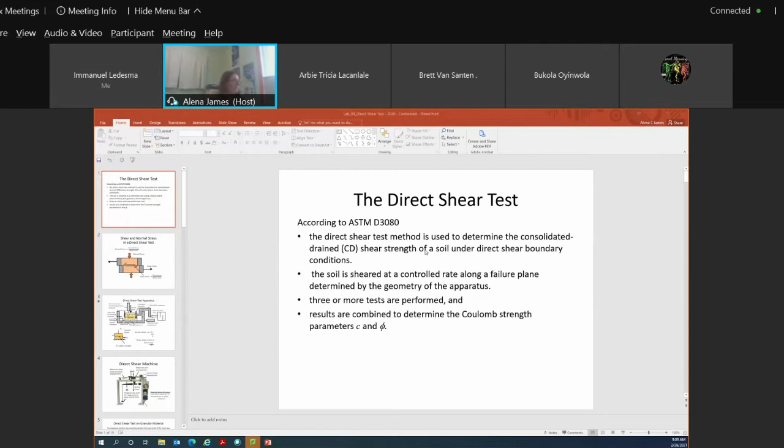This is a schematic of what your direct shear apparatus would look like. With direct shear testing, can everyone see I have two little notepads, they're kind of fluffy, one's pink, one's black. Hopefully you guys can see it. I tried to do this so you could see the difference. Imagine this pink fluffy notepad is the top half of your shear box, and the black fluffy notepad is the bottom half of your shear box.

With a direct shear test, you're applying a shear force to your shear box. On one side, on the top half of your shear box, you have an arm, and what this arm is doing is holding the top half of the shear box stationary.

So the top half of your shear box, this pink fluffy notepad, isn't able to move when you're applying a shear force to the shear box. You have an arm that holds it in place, and a load cell attached to that arm. This load cell measures the shear force required to hold the top half of the box stationary. Meanwhile, the bottom half of your shear box is able to move.

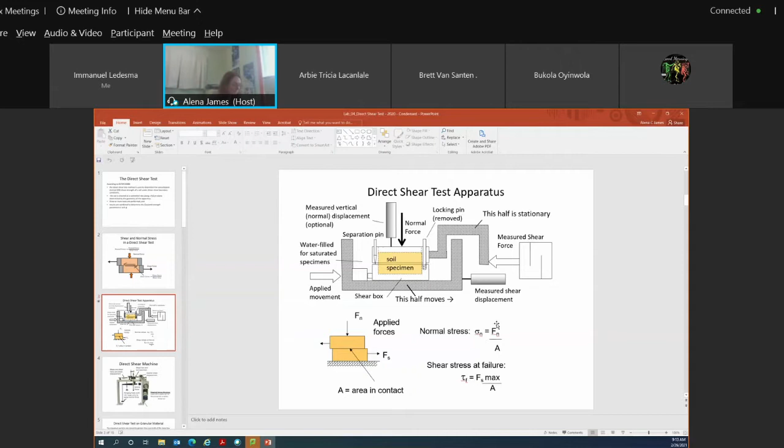In our lab, we generally only do direct shear testing on granular material, because it can be done really quickly. I'll talk about direct shear testing on clay in about half an hour. We do granular material because it can be done quite quickly - you can run a test in about 15 minutes.

The shear box is shown on the right-hand side of the PowerPoint slide, and generally the shear box is about 60 millimeters long by 60 millimeters wide, ranging between 25 and 30 millimeters in height.

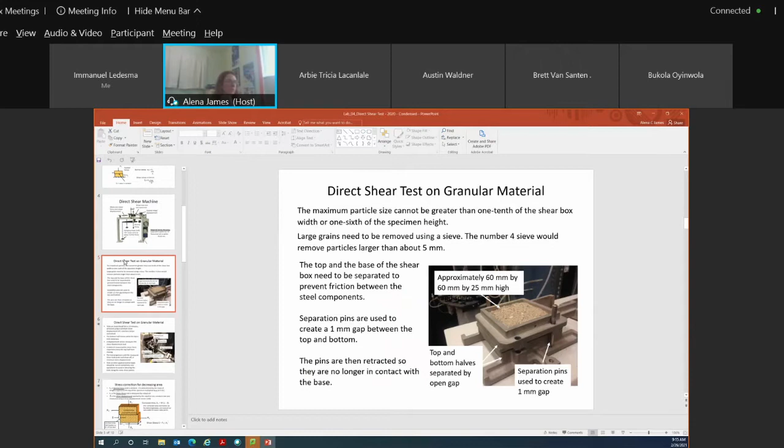When doing the direct shear test, we need to separate the top and bottom half of the shear box so that we don't have any friction between the steel components during the test. We use something called separation pins, so we can create that 1 millimeter gap and avoid friction between the steel while conducting the test.

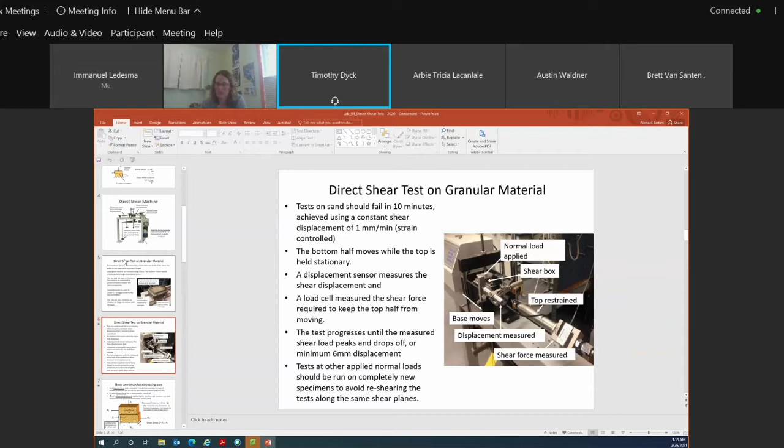So we're talking about a contact area at a specific moment in time during the test. Correct. When you do your analysis of direct shear results, you always take your maximum shear force. So your maximum shear force, if you were to convert that to a shear stress, you take the contact area at that one moment in time.

So when we're doing the test, we measure our shear force and our displacement every 5 seconds. So you would need to calculate your corrected area at each of those 5-second intervals. Your corrected area always varies because it's at a specific moment in time.

Does that make it clearer? Yeah, I think so. Okay. Anyone else want to jump in? I'm happy to answer any questions.

As I mentioned, you have to run 3 tests. Once you run one test, say using an 8 kilogram normal load, you would run your test. Then you would have to empty your shear box and put a whole new specimen in, and conduct the test again at a 16 kilogram normal force. You would go through until the shearing process is complete. Then you would remove that specimen, put a new specimen in the shear box, and run the test again at 24 kilogram normal force.

So with a direct shear test, your normal force is always constant. When you're calculating your normal force, it's determined by the mass of the weight applied to the top of the specimen. You can't actually physically apply the weight directly to the top of the specimen — you're putting the actual weight on the lever arm portion of the direct shear apparatus, and then there's an arm that comes up and over, and that force or load is applied to the top of the specimen.

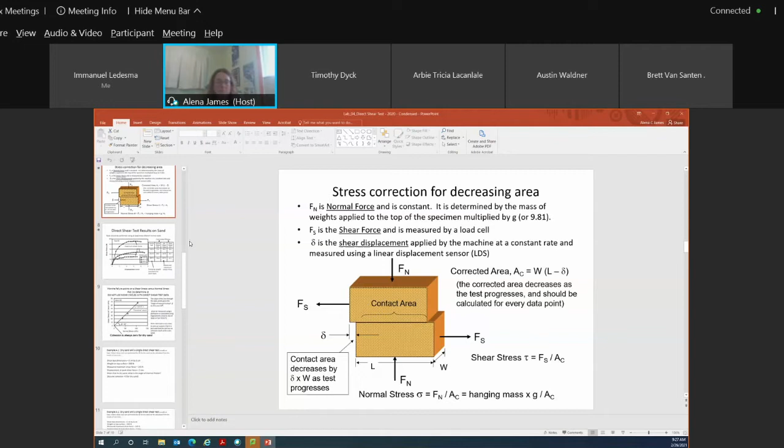Does this make sense? I just want to make sure everyone understands. Okay.

No, it's only a rectangular one, no cylindrical surfaces on the test. Yeah, those are kind of funky equations. No, anything I test you on is only related to the example problems we've gone through. If we haven't done an example problem on it, you're not going to be tested on it. Sometimes I just give you information in case you're exposed to it in industry, but if there's no example problem on it, you won't be tested on it.

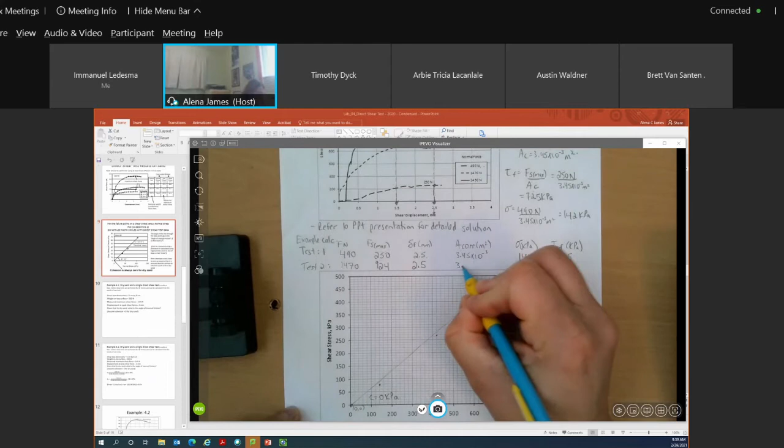If I go for test number 2, I do the same process. So I have 1,470 newtons normal force, and my max shear force was 924. My displacement, again, is 2.5, so luckily my corrected area is the same, still 3.45, because I measured the same shear displacement at failure.

So I'd just be calculating a new normal stress. My normal force is 1470, giving 426 kPa. And then my shear stress would be 267.8 kPa. So I simply plot this on the graph: 426 and 267.8, and I have a data point there. I'd go through the same process for my third graph.

So I'd use my third line on my graph. Again, I know what my normal force is, and I know what my shear force is. I would calculate my corrected area and then calculate my shear stress and my normal stress.

You find your... did I mess this up? Oh, okay, that's the next question.

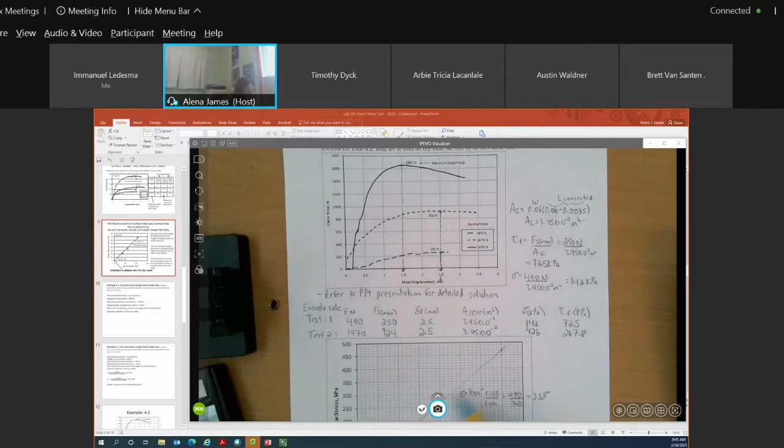So anyways, I always go through 0, 0 and do my line of best fit, Suraj. I do that, and then I plot up my third data point, which is approximately here. I think I calculated it, Kelly had it right, 470.9 and about 700.

And so I just drew my line of best fit through 0, 0 and these 3 data points, and I got about 33.8-ish as the slope of my line, or I did the arctan of it. So I calculated my friction angle to be about 33.8.

I'm going to flip over to this, okay, you guys can see this. My normal stress was about 698, or 700 is close enough. And my shear stress, I got about 470. I think that's what Kelly got.

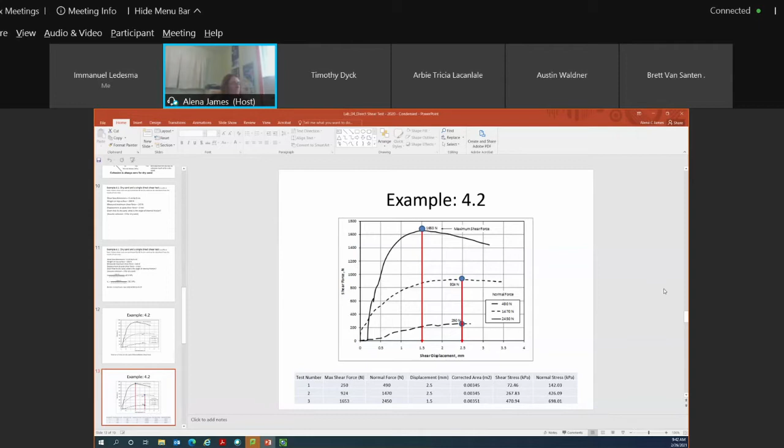Yes, so for test number 3, this would be your shear and normal stress, and that's what you would plot on this graph. Then you draw your line of best fit going through 0, 0 and calculate the slope of your line and take the inverse tan. That's how you calculate what your friction angle would be for the sand material.

On a test, you would need to indicate to me when I ask you to calculate the shear strength parameters for the sand material. There are 2 shear strength parameters you need to tell me about. The first is the friction angle, which you calculate from the slope of the line. The second is cohesion. It may make sense that it should be 0 because it's a sand material, but you still need to identify that to me on your graph or elsewhere: my cohesion is equal to 0 kPa.

Any questions on how you do the direct shear analysis for a sand material? So for finding the angle, you're just picking a point on your best fit line and using that as your inverse tangent for your result? That is correct, yes. And there's a range, usually I take plus or minus 1 degree with respect to calculating your line of best fit.

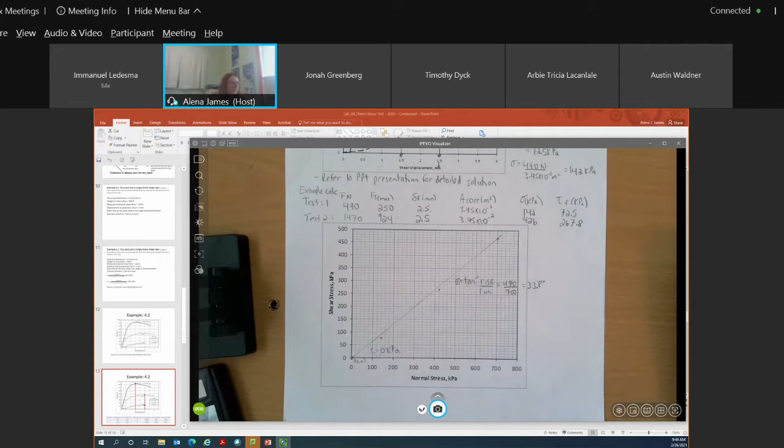Any other questions on how you calculate your shear strength parameters for a sand material?

What does friction angle imply? Friction angle represents the strength of your material. Imagine if you had sand being dumped by a dump truck. The stronger a material is, the higher the friction value that it has. Friction angle also represents the natural angle that material would stand at if dumped freely. So if sand was dumped and formed a cone shape, that's the angle of repose, the angle the material stands at without being interfered with. So a higher friction angle means a stronger material, Suraj.

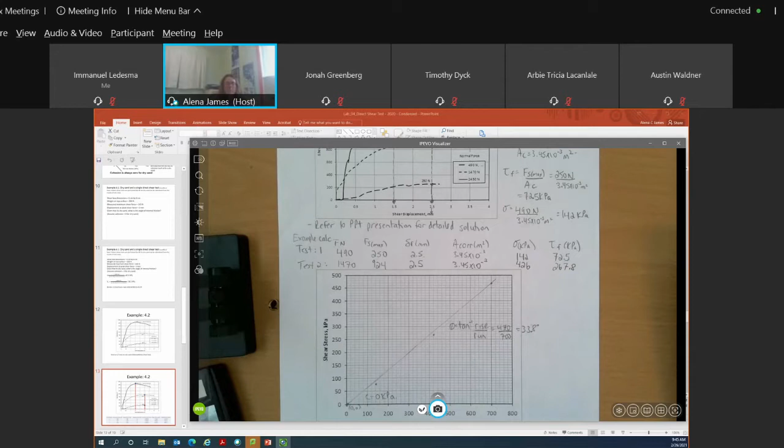Okay, I'm going to move on to this slide here. I'll spend a couple of minutes talking about direct shear tests on clay material, and then we'll go through an example, and then you guys can have a break.

Direct shear tests conducted on sand are always considered consolidated drained tests. This means that when we're conducting the test, we're not generating any excess pore water pressure, because we're not shearing at such a high rate. This will make more sense when we talk about triaxial testing. Sand is quite porous and has high hydraulic conductivity, so it doesn't matter if the sand is wet or dry when conducting the test - excess pore water pressure drains almost instantaneously. So we don't have to slow down the shearing rate, and our test duration is quite short, in the 10 to 15 minute range.

Whereas if we think of a clay material, if we add additional weight, clay is not very porous and doesn't have high hydraulic conductivity. So when we add that additional weight, we generate a lot of excess pore water pressure. We want time for that excess pore water pressure to dissipate, so the shearing rate in a clay direct shear test is really, really slow. In sand we could obtain a data point in 15 minutes, whereas in clay it takes a week to two weeks to generate a single data point. So to generate our Mohr-Coulomb failure envelope for a clay material, it takes anywhere from a month to 6 weeks, instead of an hour and a bit.

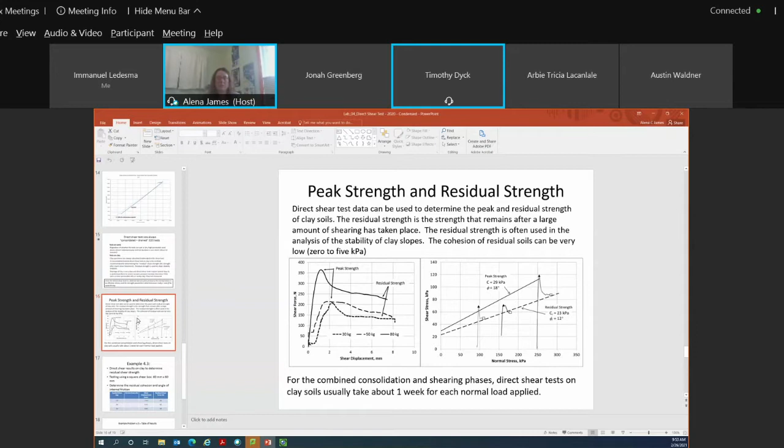Does that make sense? Yeah, I think so. Okay. I'm happy to answer questions after as well.

Hey, just another question. Sure. So in the real world, when you have a slope failure, does it happen very slowly at this rate, or would it happen more abruptly, like all of a sudden?

They happen slowly. They're almost always occurring, especially on outside bends. There's always some displacement because there's erosion at the toe or the water levels going up or down, but it's usually some event that precipitates the major movement so that it becomes observable.

So the two most common times of year when you'll see slope movement are associated with river levels going up and down. If you have a flood event and your river level's high, the stability of your bank actually increases, and the potential for movement is minimized because you have hydrostatic forces acting on that bank, preventing the movement from occurring.

But when the river levels drop, all of a sudden you have a saturated bank trying to push those soil particles apart. So the strength of your bank becomes reduced, you don't have that hydrostatic force anymore, and the bank weighs more, so the bank wants to move.

So that's one common time, or the other common time is in the fall. I don't know if everyone's seen where the river level drops a lot in the fall, especially after they draw down at St. Andrews Lock and Dam. That's another common time of year when you'll see riverbanks move, because the river level used to be higher and then all of a sudden it's lower, and the banks are still saturated from when the river was higher.

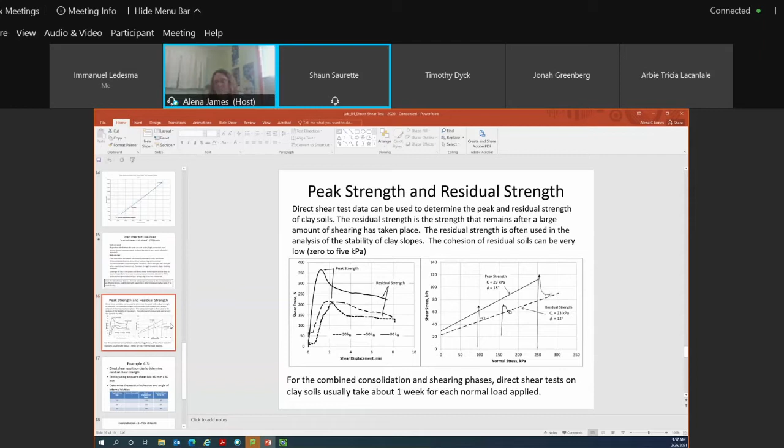Exactly. So think of it in terms of constructability as well, right? When you guys do a proctor, you have an optimum moisture content. If you're trying to construct with material that's to the right of your OMC, it becomes quite hard, and you have to use various techniques to dry out the soil. And if you're to the left of your OMC, it's also problematic because you can't get proper compaction.

Thanks for the answers. Yeah, no problem, hopefully.

Okay, I'm sure you guys are almost done. So we'll work our way through this example problem, and then we'll take a 10-minute break.

Okay, so example problem 4.3 is a direct shear test on clay material. So instead of being on sand, it's on clay material. So what would we know for sure about this question when I say that it's on clay material instead of sand? Right, perfect. Cohesion's greater than zero.

So this means that your line of best fit does not go through the data point zero, zero on your graph. If we look at this here, I've already given you your applied mass, your shear displacement, and your residual shear force. To convert from applied mass to a normal force, you just have to multiply by 9.81. So you'll see here, you just have to go 10 kilograms times 9.81, or 20 times 9.81, or 30 times 9.81.

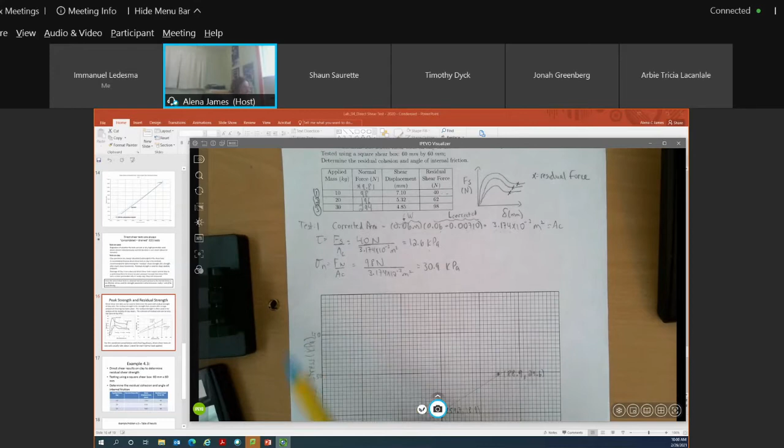My normal stress, I calculate that by using my normal force and dividing that by the corrected area. I calculated my normal force to be 98 newtons, and I divide that by my corrected area, so I get 30.9 kPa as my normal stress.

So I would want to plot this on my graph down here. You'll see with this graph I've labeled it as shear stress in kPa versus normal stress in kPa. It's always important that you label the axes of your graph and provide units, and you will be marked on that on a test, providing the correct labels for your axes and including the units.

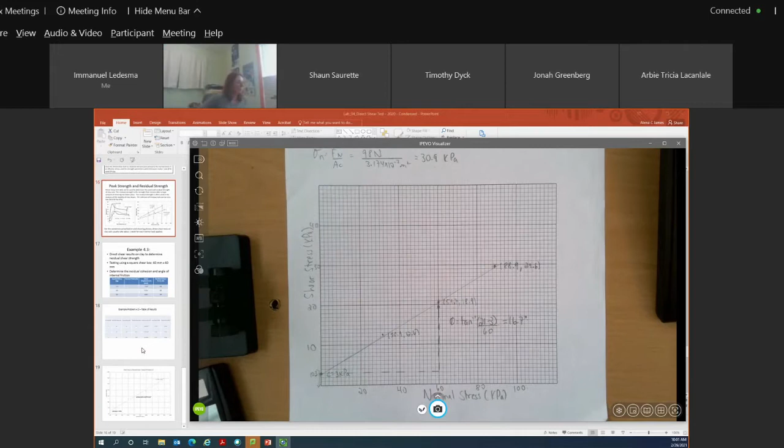So you'll see here I have 30.9 and 12.6, and so this is my first data point. I've gone through and done the calculations for the other two tests as well, test 2 and test 3.

Oh shoot, thanks, Brett. I'll start after this.

Sometimes you just forget. Okay, so I've gone through and done the calculations for the other two data points. I've provided the answers in the PowerPoint presentation, on slide 18, so you can take a look at those.

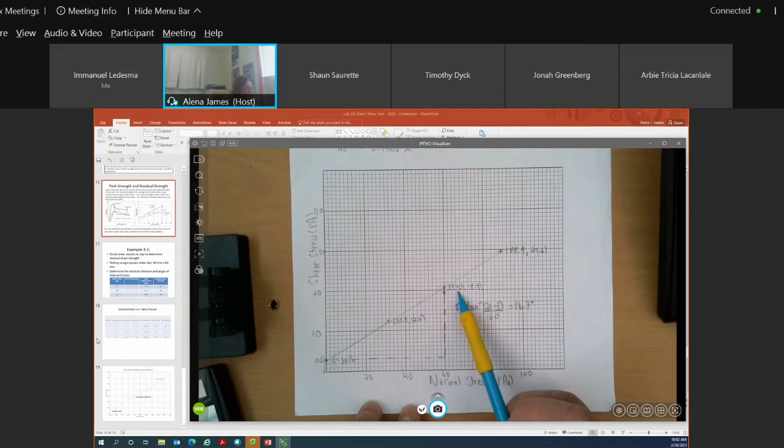You'll see that your normal stress associated with test 2 was about 59.7, and your shear stress was 18.9. With your third test, it was 88.9 for normal stress, and your shear stress was 29.6. So I plotted each of those three data points on my graph.

So I know that because this is a direct shear test conducted on clay material, I'm not going through the data point 0,0. So I know that inherently I'm going to have a cohesion value. What I'm doing as well is drawing a line of best fit that goes through these three data points.

Again, this was my line of best fit through the three data points, and it intercepted the y-axis here at about 0 and 3 kPa. Again, I do accept a range. So if you told me it was 5 kPa - well, 5 would be a little off - but if you told me it was 4, or if you told me it was 2, you would still be marked correctly for the process.

Similarly to with a sand material, to calculate what my friction angle is, I'm just taking the inverse tan of the slope of this line, taking any two data points on the line or on my line of best fit to determine what my slope would be. That's how I would calculate my friction angle for the clay material.

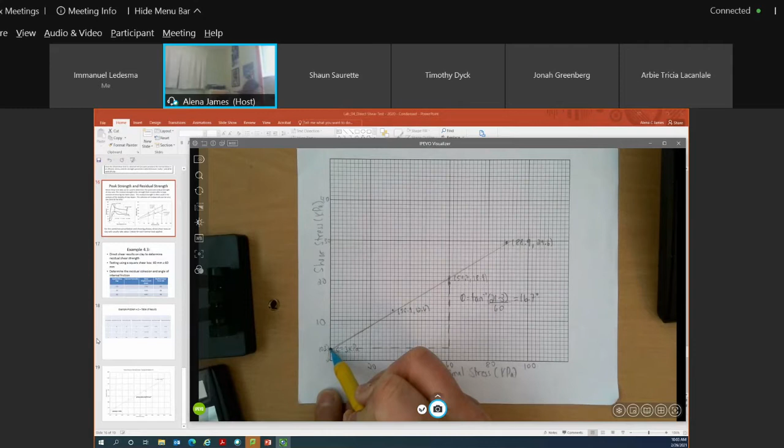And the cohesion for my clay material is, similarly to what we discussed in class last week, represented by where this line of best fit intercepts the shear stress axis. You'll see my line of best fit intercepts that shear stress axis at about 3 kPa. So this is my cohesion value, represented by where that line of best fit intercepts the shear stress axis. My cohesion value in this case is equal to 3 kPa.

Anyone have any questions on the process for doing direct shear tests with clay?

On a test, your shear boxes will always be rectangular in shape, even for a clay material. If I were ever to test you on a clay material, I would still tell you that your shear box was square or rectangular instead of circular in shape.

So how do we plot this during the test? You plot it on graph paper. For the test that's coming up, you'll need graph paper and a compass, and it will be your responsibility to have them. I can send out some graph paper to you guys if you want, but you would have to print it out. I'll show you what a compass is—it's not one for navigation, it's for drawing circles.

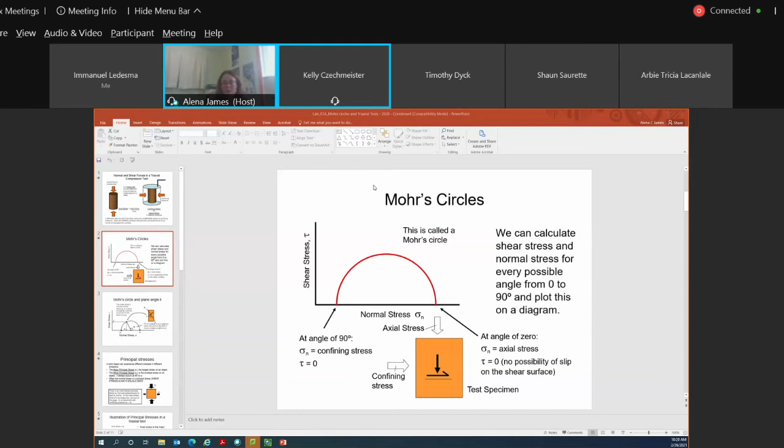For students who have iPads or would prefer to graph in Excel or other electronic means, I have no issue with that. In my opinion, that's the beauty of online learning. If you don't want to do it by hand and you program something in Excel or on your iPad, I'm okay with that.

If people prefer to use a compass, like this is a compass, I don't know if you guys can see it. It cost me $2 at the dollar store. They come in all those geometry sets, so for anyone who has kids doing geometry in junior high, they come in those sets. You just add a little pencil to it. Mine comes with a pencil lead already in it, so that's why I bought the $2 version. It has a tip or a point on one end, and that's what you put on your paper.

However people want to plot circles, I'm okay with it, as long as it works. So Kelly, if it works with the protractor, great, just use that.

Okay, we're going to talk about triaxial testing now. Oh, do they? Yeah, that's what mine is too, a Staedtler from the dollar store. It was $2.

Triaxial testing is another way in which we can determine shear strength parameters of clay material. It's similar to unconfined compressive strength testing, where you need a material that has cohesion that can stand vertically unsupported. The similarity between unconfined compressive strength testing and triaxial testing is that an axial stress or axial load is applied to specimens using both testing methodologies.

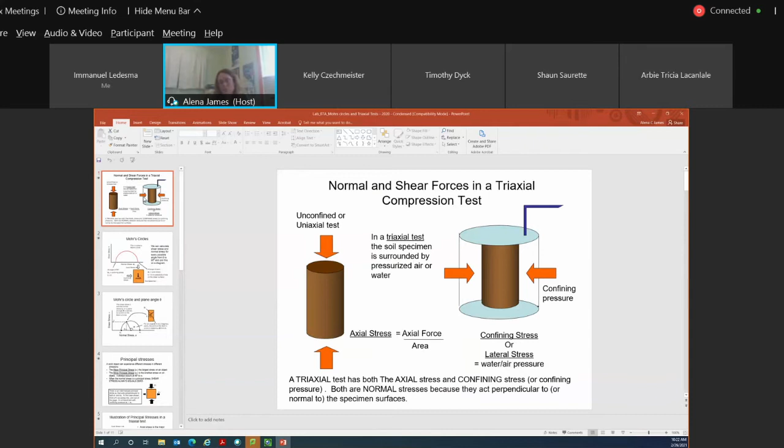Mohr circles. You plot your data for triaxial testing on something called a Mohr circle. Mohr circles need a protractor, or sorry, a compass, which I showed you, to plot them. A Mohr circle is used because you can calculate your shear stress and normal stress for every possible angle from 0 to 90 degrees on an imaginary plane and plot this on a diagram.

Imagine if I had an angle of 0 degrees, this is my angle. If I was to apply a normal force to it like this, that normal force is my axial stress being applied. At that angle of 0, I have an axial stress value, but no shear stress value, just a normal force. Similarly, if I was at 90 degrees, I would have a confining pressure applied to the specimen, which is also a normal force because it's acting perpendicular to the specimen.

Mohr circles are unique little beings. The way you plot data on Mohr circles is by multiplying the angle by 2. So say, for example, if I had an angle of 90 degrees, the way it plots on a Mohr circle is I multiply that 90 by 2, and it plots at an angle of 180 degrees. This data point right here represents an angle of 0 degrees, and this data point represents an angle of 90 degrees, because I multiply the 90 by 2, and it plots at a 180 degree angle.

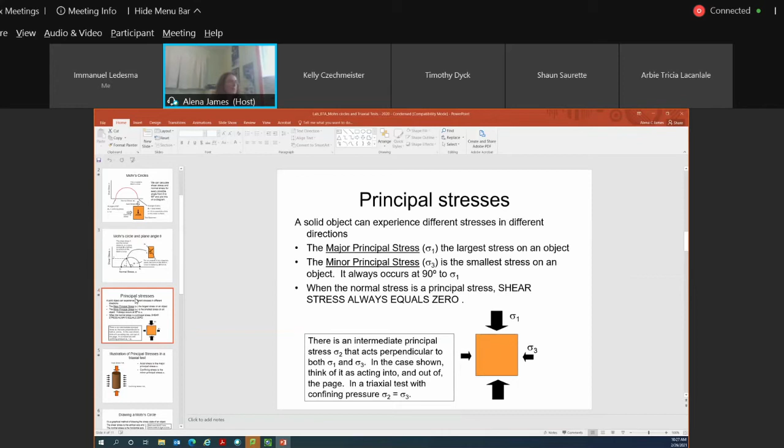Your minor principal stress is the smallest stress acting on an object, and it always occurs at 90 degrees to sigma 1, so it plots as 180 degrees on your normal stress axis from your major principal stress. When your normal stress is a principal stress, your shear stress always equals 0. Going back to these plots, shear stress versus normal stress: your sigma 1 value plots where shear stress is 0, and your sigma 3 plots at an angle of 90 degrees from it, or 180 on the Mohr circle, also with a shear stress of 0.

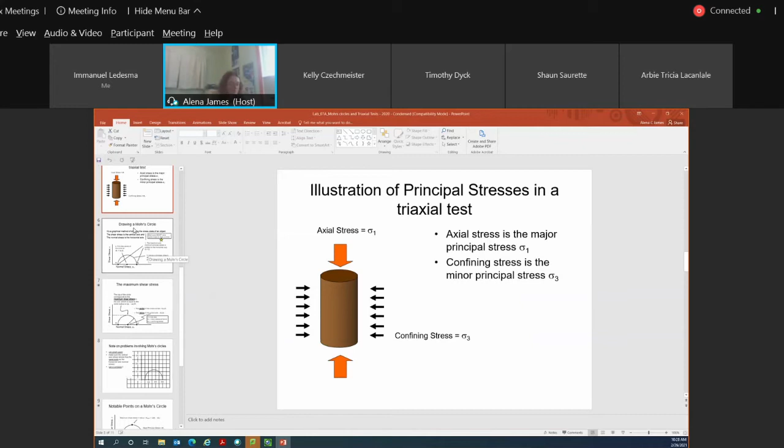This is just an illustration of your major and minor principal stresses as well. I kind of condensed the slides for this presentation significantly, so my expectation is you still go through and read the theory that was presented on the slides. I just didn't want to go over it in class because I think you can read it, and our time together is quite limited.

So drawing a Mohr circle is really a graphical method of drawing the stress state of an object. When you're drawing a Mohr circle, you would generate an X and Y axis. On your Y axis is your shear stress, tau, and on your X axis is your normal stress value.

The important difference between drawing a Mohr circle and doing your plots for direct shear testing is that your direct shear plots don't have to have the same scale on your X and Y axes—you can just calculate the slope of your line. When you're doing Mohr circle drawings, both your X and Y axes have to have the same scale, or the answers you determine will be incorrect. So if you have an increment of 20 per space on your X axis, then each space on your Y axis also has to represent an increment of 20.

The maximum and minimum principal stresses are plotted on your horizontal axis, your X axis, with sigma 1 being your largest stress value and sigma 3 being your smallest. You can determine the center of your circle by taking the average of your sigma 1 and sigma 3 values. And the best way to plot your Mohr circle is...

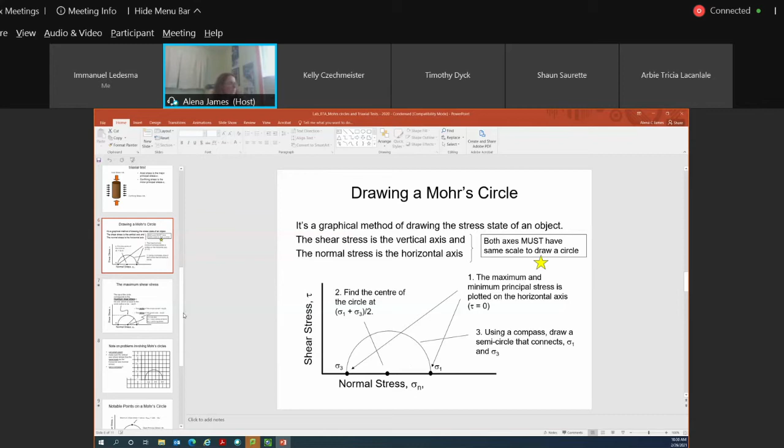Maximum shear stress for a Mohr circle is always represented at the top of your circle. Your maximum shear stress value is always equal to the radius of your circle, because this is the radius of your circle. So your maximum shear stress is always equal to the radius of your circle.

When we're doing a triaxial test, sigma 1 is represented by your axial stress at failure, and sigma 3 is equal to your confining stress. I'll talk a bit more about confining stresses in a few slides.

No, it is not - triaxial stuff isn't on your quiz this afternoon. I'm not going to give you a quiz on the triaxial stuff. You'll just have to know it for the test next week.

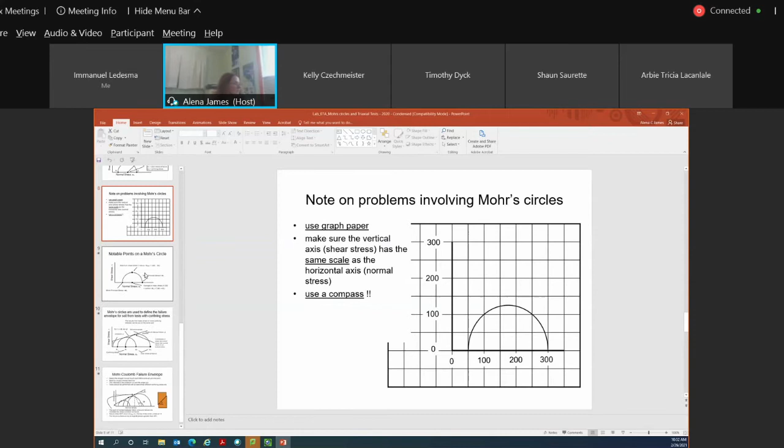We talked about notable points already on your Mohr circle, so I'm not going to dwell on that. Mohr circles are used in exactly the same way as your direct shear test data points. You're drawing a Mohr Coulomb failure envelope, and from that envelope you're determining your shear strength parameters, in exactly the same way as you determine them for a direct shear test.

You can determine what your cohesion value is, because your cohesion value is simply represented as the distance between 0,0 and where your line of best fit intercepts the shear stress axis. So this is equal to your cohesion value. And the slope of your Mohr Coulomb failure envelope, or the arctan of it, is equal to your friction angle.

You'll note with your Mohr circles, your line of best fit should never be going through the top of your Mohr circle unless your specimen is saturated, and I'll get into that. Your line of best fit is typically tangent to the point of maximum curvature of your Mohr circle. That's typically how you draw your Mohr Coulomb failure envelope if the material is unsaturated for UU, or if you're doing a CU test.

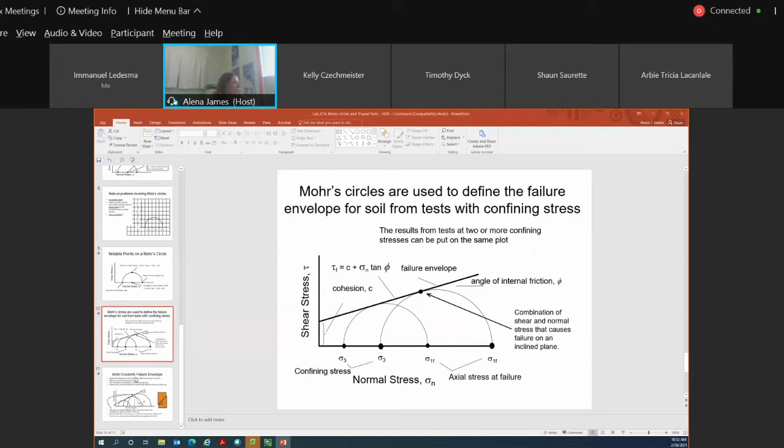This is just sort of what I discussed on the previous slide. I know this was an extremely quick Coles Notes version - there's a lot more on the PowerPoint presentation I gave to you guys on Learn, so make sure you read through that thoroughly.

But before I move on to UU testing and go through some example problems, does anyone have any questions on Mohr circles before we move on? I'm sure this is new for everybody.

So the whole point of drawing that line is to try to find the angle of the failure. Correct - it's to determine your angle of failure so you can determine your shear strength parameters. It's just another tool in your toolbox to determine shear strength parameters.

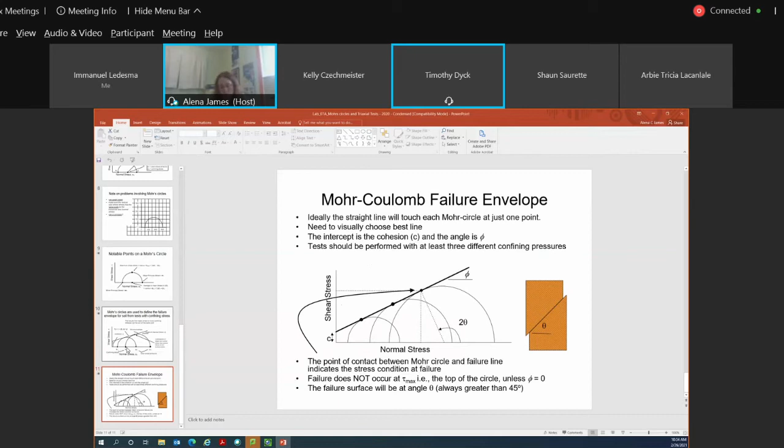Because when you draw the half circle, I'm like, okay, are we looking from the top? You only look above 0,0 - so anything that's greater than 0. You don't worry about anything that's below 0, like any negative numbers - we don't worry about those.

You will need some practice. There are multiple example problems, but it will take a bit of practice with drawing the circles and the lines. Again, there is leeway because it's data analysis and interpretation, so I'm looking for the process more so than whether you were bang on with your actual answer. So I have leeway with cohesion and friction angle - I have a range of values that I accept.

But you guys will get good at it. I have full confidence.

Okay, so we're going to now talk about UU testing. You do need to be able to draw Mohr circles for UU testing. UU triaxial testing stands for unconsolidated undrained triaxial testing. This is another tool in your toolkit to determine your short-term shear strength parameters, so you're able to find your cohesion and angle of internal friction by conducting 3 or more tests at various confining pressures.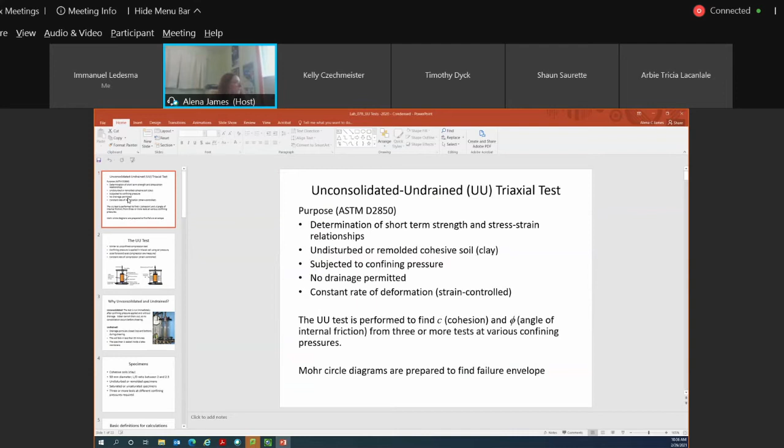As we talked about, triaxial tests are similar to unconfined compressive strength tests, and UU is an example of a triaxial test. With a UU test, we're applying a confining pressure in a triaxial cell to the sides of the specimen, and that confining pressure in a UU test is applied by air. Different confining pressures are applied depending on the test, because we need a minimum of 3 tests. In our lab, we usually use 10, 20, and 30 PSI as our confining pressures. One group conducts a test at 10 PSI, another at 20 PSI, and another at 30 PSI.

We try to have very similar specimens that each group is conducting the test on. We'll collect Shelby tube samples and divide those specimens into 3, so that each group has a representative sample that they're testing.

You measure your axial force applied to the specimen, similar to what you would do in an unconfined test. We also measure axial compression - how much the specimen is decreasing in height - exactly the same as in an unconfined test. Again, like an unconfined test, we have a constant rate of compression. We use 1% of the specimen length, same as what we do in an unconfined test.

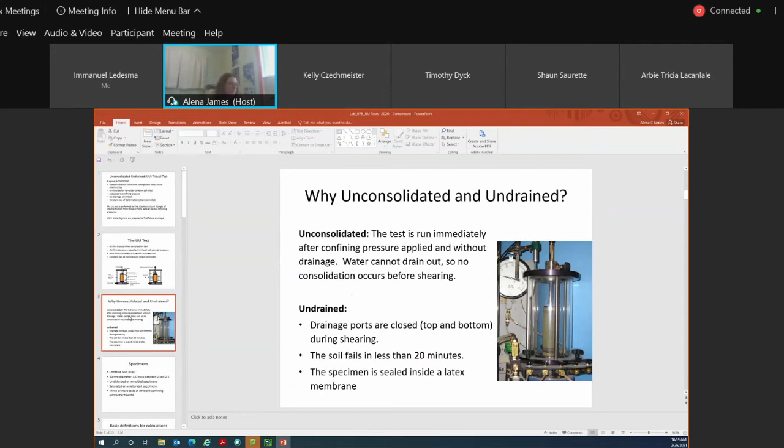I'm not going to spend a lot of time on this. Sample prep is pretty much the same as an unconfined test. We have the same L to D ratio. You'll note the diameter is a little bit smaller when running a triaxial test compared to an unconfined test. You can run a UU test on both saturated or unsaturated specimens. And again, it has to be a clay material because it has to stand vertically unsupported in the triaxial chamber.

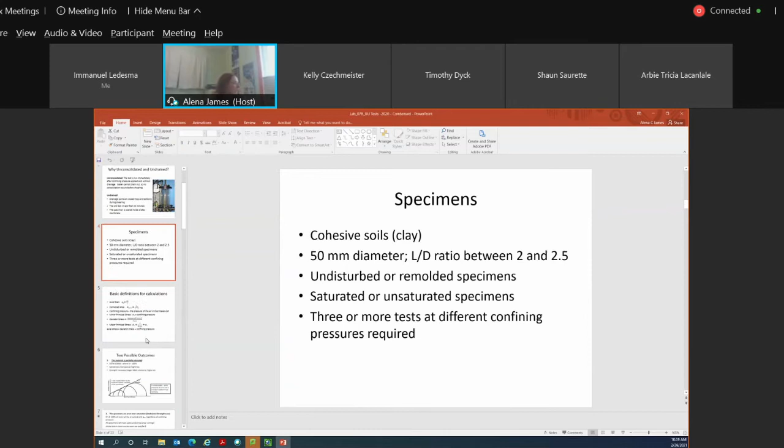There are 2 possible outcomes associated with conducting UU tests. You can conduct UU tests on either unsaturated or saturated material. Unsaturated material is anything with a degree of saturation of less than 95%. With unsaturated specimens, your soil density increases as you have a higher confining pressure. I did 3 plots, and you'll notice that as my confining pressure, or sigma 3 value, increases, so does the radius of my circle, and my sigma 1 value is also larger. So as I apply a larger confining pressure, my strength is also increasing because the radius of my Mohr circle is increasing.

This is what transpires when you have an unsaturated specimen. Meanwhile, if you have a saturated specimen, meaning your degree of saturation is generally greater than 95%, all your specimens have Mohr circles with approximately the same radius. You'll see here that the radiuses of the circles I presented aren't increasing - all the radiuses are approximately the same.

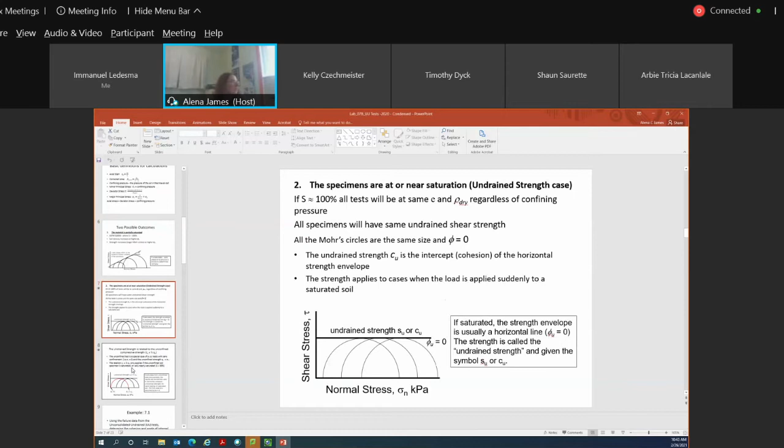So the correlation between UU and unconfined compressive strength testing is shown here. You can plot your unconfined compressive strength data on your UU test data, and you'll see that the undrained shear strength value you determined from your unconfined compressive strength test matches with your UU test data. So you can plot that here.

That red circle represents your unconfined compressive strength data. So if you're plotting your unconfined compressive strength data, your confining pressure is equal to 0, and your sigma 1 value is simply equal to your unconfined compressive strength. You can plot that as a Mohr circle to compare to your UU test data.

Okay, I'm going to pause there, and give an opportunity for you guys to ask questions. I don't know if anyone started this material.

Has anyone started working on triaxial tests? Yes, okay. Do you have any questions, Kelly? No, I'm getting it so far. You're getting it, okay.

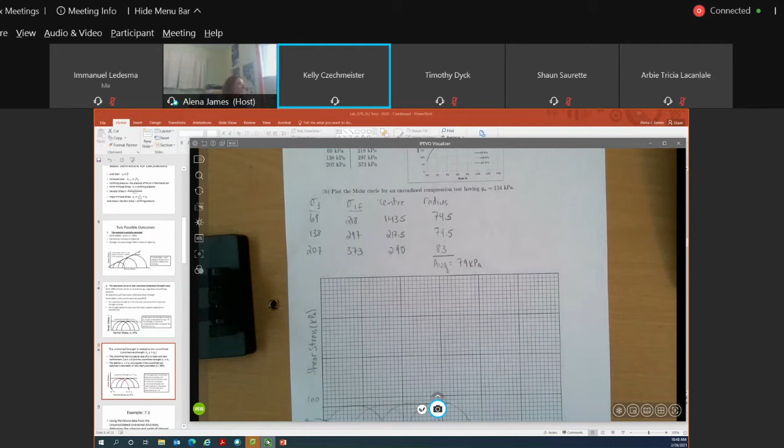Half times sigma 1 plus sigma 3. Correct. So it's just the average of sigma 3 and sigma 1 that is the center of your circle.

And then the radius of the circle, do you guys remember what the radius is? Same thing, just subtracted. Correct, exactly, 100%, perfect. So you can determine what the radius of each of your circles are.

So I just went through and I do the exact same calculations for my second set of data. So if this was data set 1, 2, and 3, this would represent data set 1, 2, and 3. I've gone through and calculated what the center of each circle would be and what the radius of each circle would be for each of my 3 different tests.

I'm going to move this up a bit. So let's look at our first data set. I know the center of my circle is 143.5 kPa, or so the center of my circle is...

140. So each of my squares represents 10. So here. And then my sigma 1f value is 218 kPa. So that represents this point here.

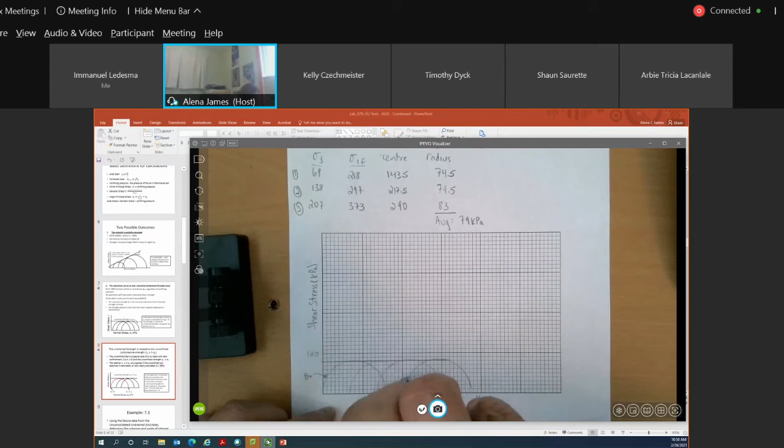And I know that my Mohr circle should also intercept my sigma 3 value at 69 kPa. So this right here represents 69 kPa, and this right here represents 218. Sorry, right here, and then right here. You'll see here, if I was to draw my circle, it looks like this. So that's my first Mohr circle.

My second Mohr circle would be the same. I would put the pointy part of my compass at 217.5, so approximately about right here. And then sigma 1F is about 297. So I'd put my pencil—the sharp point is at the center, and my pencil is at sigma 1F, which is 297. I just draw my circle so that it intercepts my sigma 1 and sigma 3 along the x-axis. That's how I draw my Mohr circles for each of the different data sets.

So I go through and draw it for data set number 1, data set number 2, and data set number 3. You'll see here that I have 3 Mohr circles: this would be data set 1, this would be data set 2, and this circle would represent data set 3. If you look at your radiuses here, they're all approximately the same, so you know that this represents a saturated specimen.

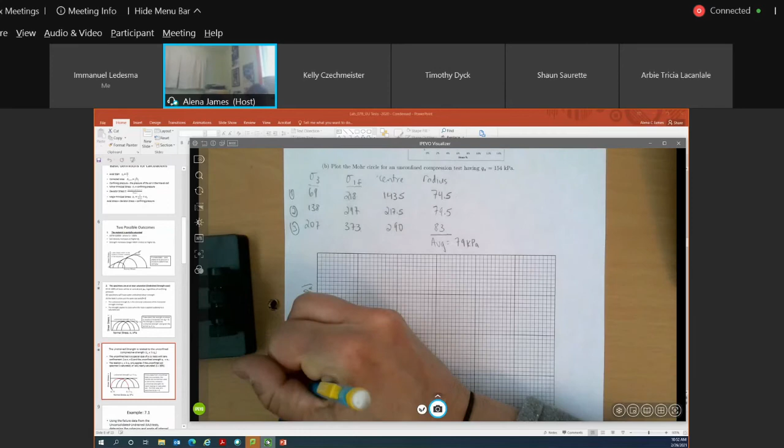So there are 2 ways in which you can determine your undrained shear strength parameters. You can either determine it from using your Mohr circles and showing me on the plot that you took an average value and drew your line of best fit along the top of each of these different Mohr circles, and that your line of best fit would give you an undrained shear strength value of about 80 kPa.

You can also just average your radius values, and if you average your radius value, you calculate about 79 kPa. So you could say your average undrained shear strength is 80 kPa, or 79 kPa. Again, we have a range, so both would be marked correct.

Alena? Yes. Are those 2 radiuses correct for 2 and 3? I will double check them. I don't think they were multiplied by half.

Yeah, I got 79.5. So 297 minus 138, and 83. So 297 minus 138 times 0.5—I still get 79.5. Oh, okay.

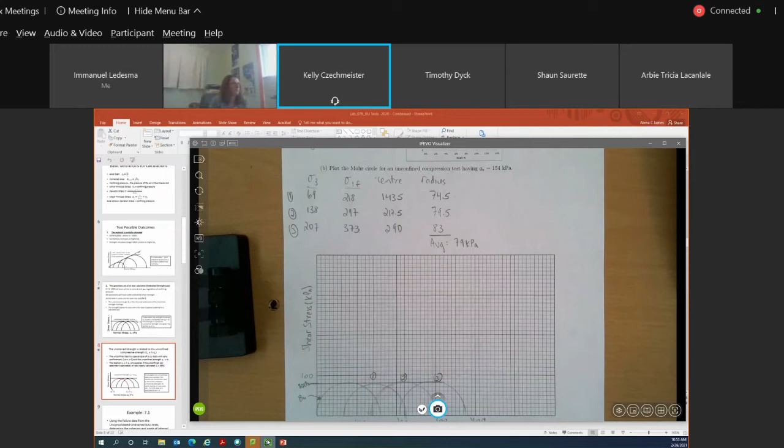Do you get that, Kelly? I must have screwed something up, I'll just double check. Okay, well, we can go through it after class as well if you like.

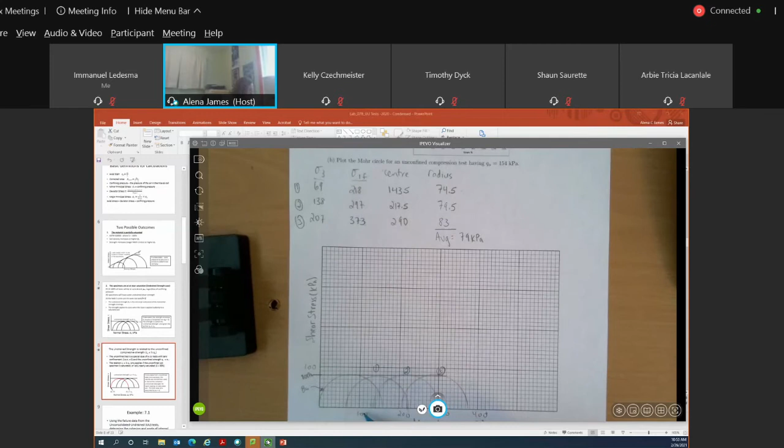So you'll notice here with your Mohr circle plot, you have shear stress on the y-axis and normal stress on the x-axis. I've provided the units of kPa and kPa, and each of my squares represents the same increment. So with the dark line here, each of these dark lines represents 100 kPa on both the x and y axis. So that's why we were able to draw the Mohr circles accurately.

So this is how you would go through and do the data analysis and interpretation for a UU test with this data that was given for a saturated specimen.

That being said, on a test, I'm not going to tell you if your specimen is saturated or unsaturated. You will have to determine that from the shapes of your Mohr circles. If your Mohr circles are approximately the same radius and the same size, you know your specimen's saturated. If your Mohr circles are increasing in diameter or radius, then you know you have an unsaturated specimen.

I'm going to pause. I don't know how many of you have started triaxial tests, but I'm going to pause for questions in case anyone has any.

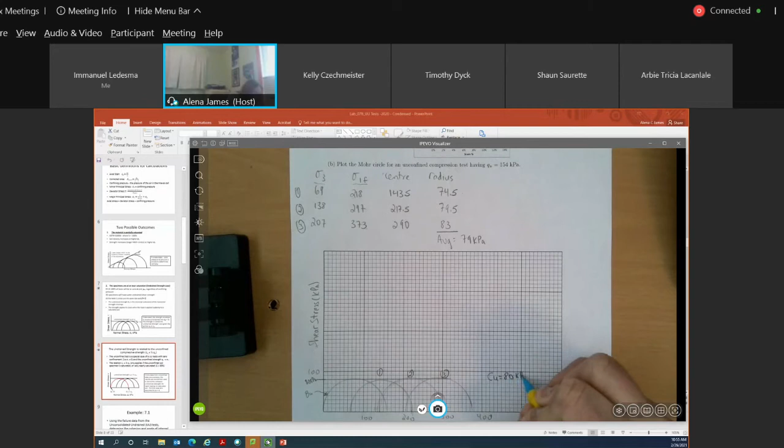Well, you would state that your friction angle, phi, is equal to 0, but you would state that you have a CU value equal to 80. So your CU value is equal to 80 kPa, because that represents your undrained shear strength value. And you would say phi u is equal to 0 degrees.

So good point. On each of the triaxial tests that you're doing your analysis on, please state what your friction angle would be and what your cohesion value would be, because those are the two shear strength parameters that we're looking for.

Okay, the second half of this question asks you to plot the Mohr circle for an unconfined compression test having a QU value of 154. So we kind of went over that quickly.

So here, this would represent your sigma 3, which is equal to 0. So you would have a sigma 3 value here. Your sigma 1F value would be equal to 154 kPa. So that would be equal to 154.

So you would determine what the center of your circle would be. It would simply be 0 plus 154 divided by 2. So what would that be? 77? 77.

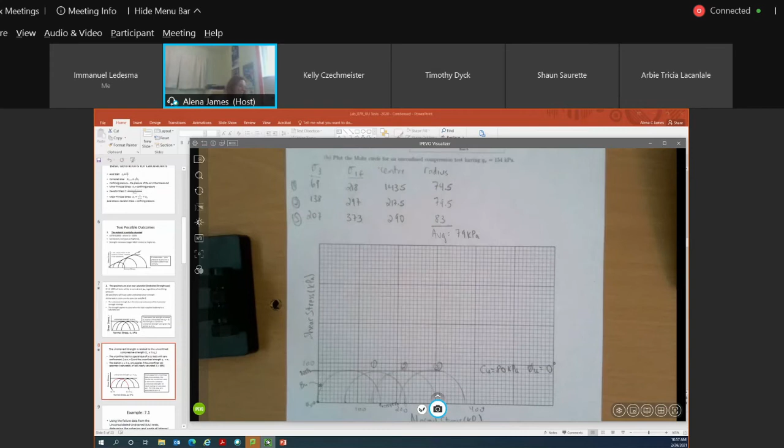So you would take the center of your circle here, and you would draw your Mohr circle. Let's see. I'm going to draw my Mohr circle, have an intercept of 0. And you can see that the undrained shear strength value from my unconfined compressive strength test matches well with the undrained shear strength parameters calculated from my UU test.

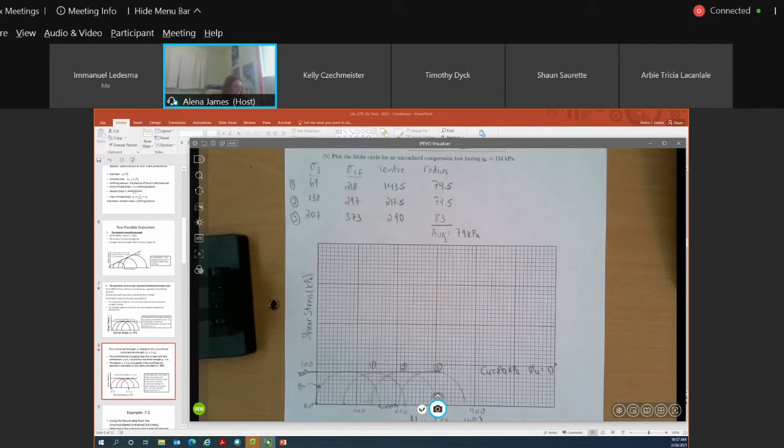Okay. Before I move on to an example with an unsaturated specimen, does anyone have any questions?

And then you guys can have a break. How much more were you hoping to cover today? Just CU tests after this. I'm open to suggestions. If you guys would prefer a longer break after I finish UUs, then I can go over it this afternoon, or if you want me to talk about it next week, that's fine. But CU test will be on your test next week. I'm open to suggestions, whatever works best for you guys.

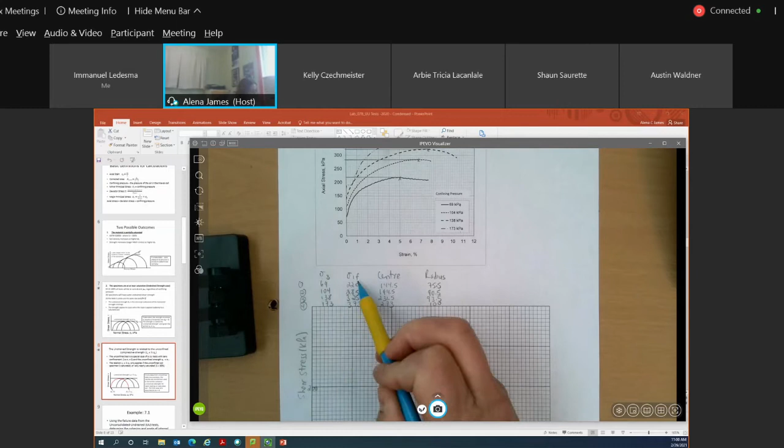So you have confining pressures of 69, 104, 138, and 172. From the plots, I'm able to pick off my maximum axial stress value. Here it's around 220, here around 285-ish, 325, and 373. My maximum axial stress values represent my sigma 1 F values, and my confining pressures for each test represent my sigma 3 values. So I have 4 tests, and my sigma 1 F values are 220, 285, 325, and 373, which I got from interpreting this axial stress versus axial strain plot.

Once I have my sigma 3s and sigma 1 values, I can determine the center of my circle and the radius of my circle. I won't go through the calculation for each, but you know the formulas to use. I've made a plot of shear stress versus normal stress in units of kPa, with both x and y axes on the same scale, so each dark line represents 100 kPa.

I've plotted each of my different Mohr circles for each of my 4 different tests. You'll see the radius of my circle is increasing as my sigma 3 value is increasing, so the radius gets larger as confining stress gets larger. If that's the scenario, the specimen would be considered unsaturated, and if unsaturated, you should have both a cohesion value and a friction angle value.

I've drawn my 4 Mohr circles, and now I'll draw my failure envelope, which represents my line of best fit for each of these 4 Mohr circles. This was approximately my line of best fit that intersected, as best as I could, the point of maximum curvature of each of the 4 circles. It's really just a line of best fit, so there's leeway within your cohesion and friction angle values. I'm looking for process more than a bang-on value — I have a range of values that I accept.

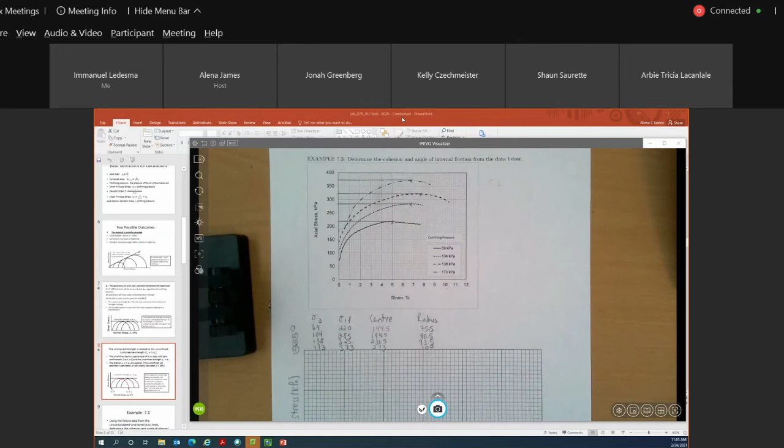So Pavel, why do you want to know about the retaining wall design? Well, I was just looking at all those review assignments, and when I looked at that retaining wall design, I was like, whoa, that's a lot of calculations. No, you guys will be good with that — that unit, most people do really well on. This is the hardest unit I find — what test number 1 will be on is what students struggle with the most, because it's open to interpretation and data analysis. Moving forward after that, the material — I won't say subjective, but it's open to interpretation and analysis — it's much more calculation based.

I find students excel at that content a little bit more. All right. Well, personally, I haven't studied this particular section, so I'm looking at it as you go. I really don't understand what's going on. I'll need to read it again for sure.

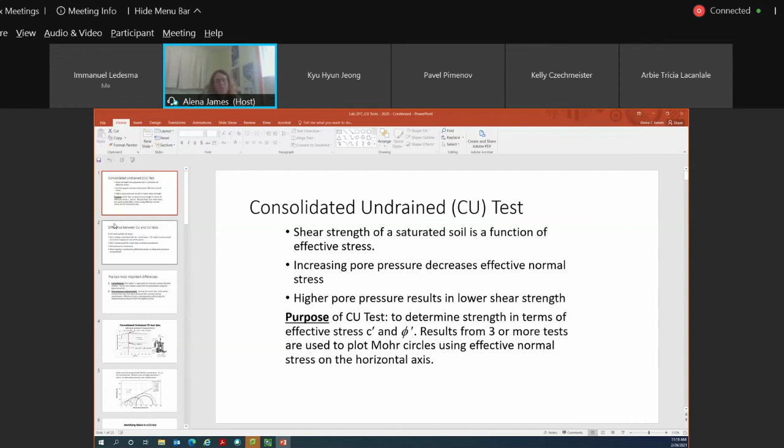Consolidated undrained triaxial test, or CU test, is another type of triaxial test we use. The reason we do CU tests compared to UU tests is to determine our long-term shear strength parameters. With a CU test, we can determine both our effective cohesion value and our effective friction angle, which are our long-term shear strength values.

The difference between CU and UU tests is that CU tests always have soil that's saturated. In a CU test, we saturate and consolidate the soil within the triaxial chamber for a week. Recall with the UU test, you just put your specimen in the triaxial cell, apply confining pressure with air, and shear instantaneously. With a CU test, you put your specimen in the chamber and apply confining pressure with water instead, saturating and consolidating the specimen concurrently, a process that takes about a week.

You leave the specimen in the chamber for a week, with drainage ports open so excess pore water pressure has time to drain as the specimen consolidates. Then you close the drainage ports a week later and shear the specimen.

So when conducting the CU test, your shearing rate is quite low again, about 1% of the sample length per hour, compared to the usual 1% per minute. It's a slower shearing process, usually taking about 4 to 5 hours to shear the specimen.

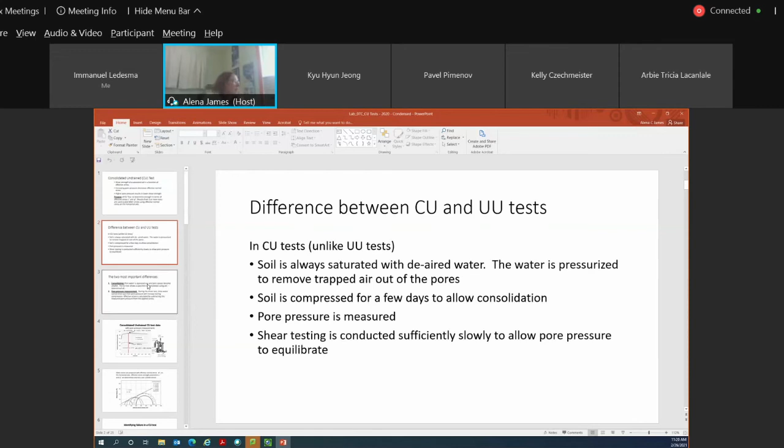During that shearing process, we measure pore water pressure. In a UU test, we don't measure pore water pressure even though excess pore water pressure is generated, whereas in a CU test we do measure that excess pore water pressure, giving us values we can use to determine our effective shear strength parameters.

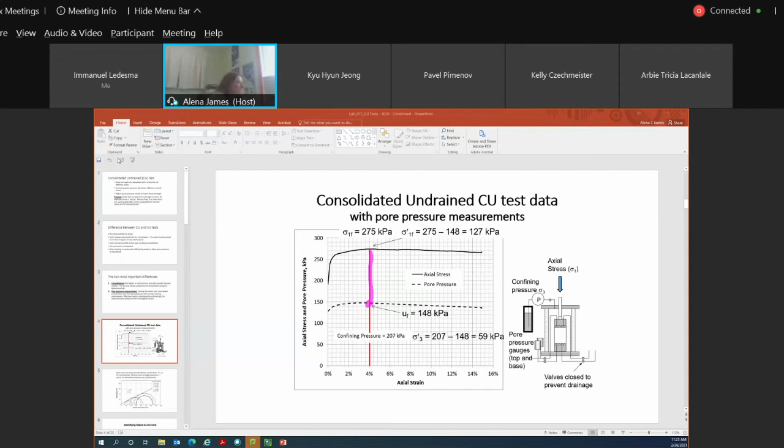The reason the term shear stress doesn't have 'effective' in front of it is because shear stress equals sigma 1 minus sigma 3. If we calculate effective, sigma 1 effective would be sigma 1 minus u, minus sigma 3 minus u. This becomes, with brackets - and I'm sorry for the mess - this minus minus becomes a plus u, so the pore water pressures actually balance each other out. So it really is simply sigma 1 minus sigma 3, which is your shear stress. That's the reason shear stress doesn't have the word effective in front of it.

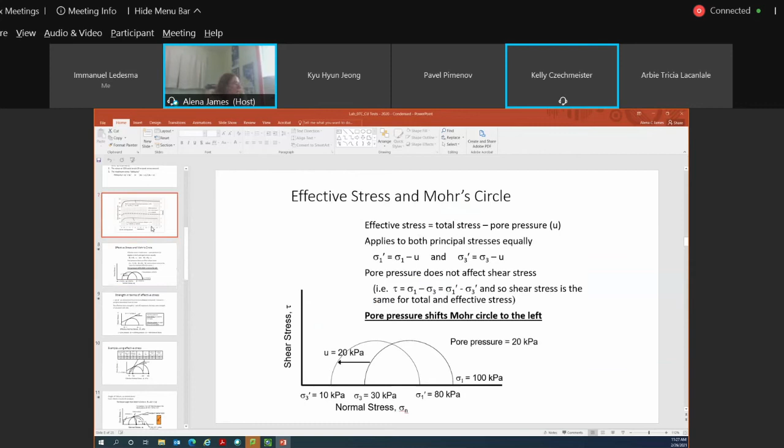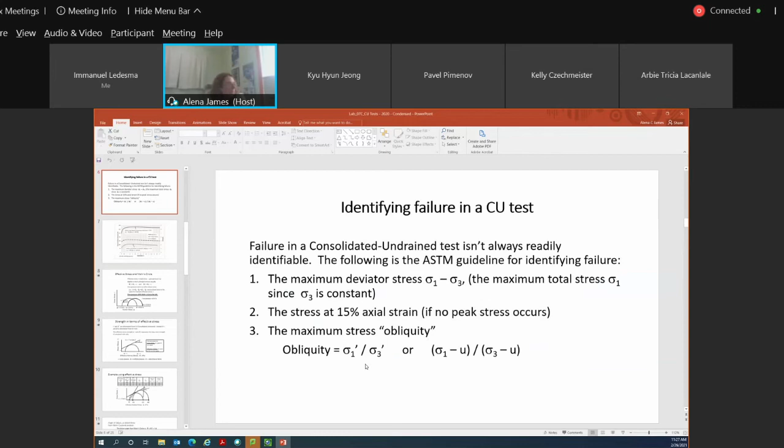Yeah, that's obliquity, don't worry about it. It's just a ratio. If you see here, this ratio of sigma 1 prime to sigma 3 prime, that's how you plot that. But don't worry about it, just focus on the two top ones.

Even if we were to do the lab in person, Kelly, we don't plot obliquity. This gets confusing.

This slide illustrates the difference between a Mohr circle plotted from a UU test versus a CU test. This Mohr circle on the right was data plotted from a UU test. You'll see here this was the data: sigma 1, which is 100 kPa, and sigma 3, which is 30 kPa. Now imagine if this was data from a CU test.

With a CU test, we have pore water pressure, and our pore water pressure was measured to be 20 kPa. To plot our Mohr circle for the CU test, we have to subtract our pore water pressure value from both sigma 1 and sigma 3. So sigma 1 becomes sigma 1 prime, an effective value, and it plots at 80 kPa. Our sigma 3 becomes sigma 3 prime, since we subtract pore water pressure of 20 from the original 30, so it plots as 10 kPa. This plots as our new circle for the CU test data.

The interesting thing to note is if you look at the circle center for the test conducted in CU versus the circle center for the test conducted in UU, the difference in the circle centers is simply your pore water pressure value. The difference in this instance is 20 kPa, the same value as your pore water pressure. So the circle centers are offset from each other by your pore water pressure value.

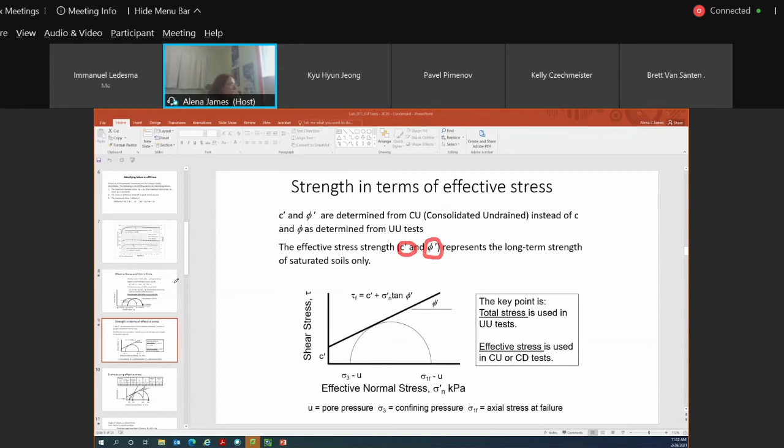Okay. Anyone have any questions before I go over an example problem?

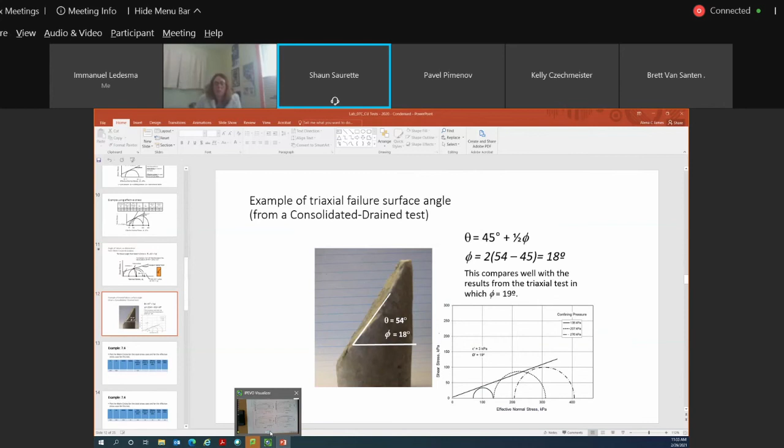Okay, real world characteristics. Total stress would be going back to that embankment scenario. If I was to construct an embankment on a foundation area and put all the load from the embankment there instantaneously, or say I'm doing a foundation for a building and I construct the foundation and apply the load from that structure instantaneously, my total stress parameters are what is the strength of my soil when I'm applying that load instantaneously.

So my pore water pressure goes up, it hasn't had time to dissipate, and it's pushing those soil particles apart. So my shear strength parameters of my soil are typically lower than what they were before I added the load.

Your effective or long-term shear strength parameters are where you've applied the load and the pore water pressure has had time to dissipate. So instead of pushing the soil particles apart because there's extra pressure in that void space filled with water, that water pressure has gone away. So your soil particles are able to come closer together and have more contact. So the strength of your soil has gone back to what its pre-construction strength was, and it's increased compared to when you had applied that load suddenly to the area.

Does that make sense? Makes sense. Thank you. Okay, I like questions, so please keep asking them.

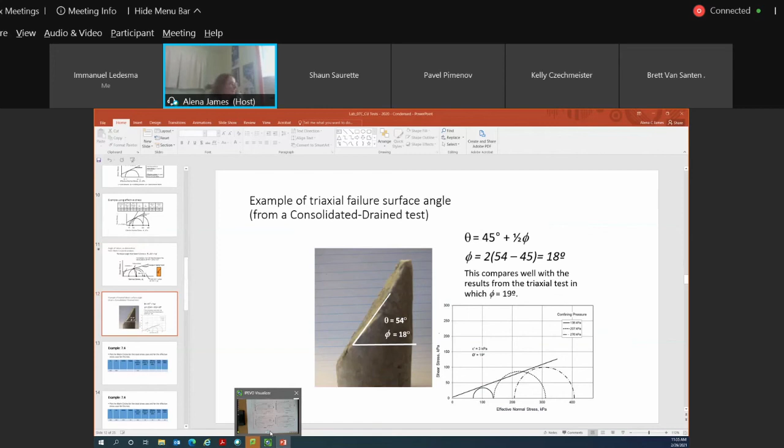Okay, I'm going to go through this example problem, and then you guys are free to go.

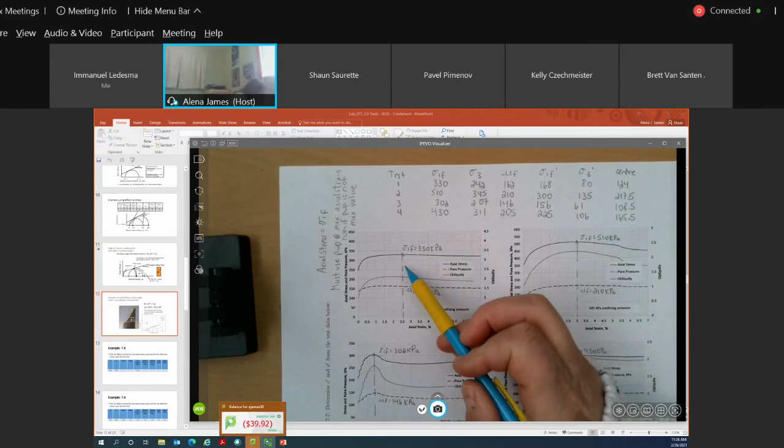So obviously we have four sets of data. I just labeled them as tests 1, 2, 3, and 4. With each of those tests, we'll have an axial stress at failure and a pore water pressure at failure. If we look at this test right here, we'll label this as test number 1.

So we'll see here, this top line is my axial stress plot. This looks approximately to be my peak axial stress, which is around 330 kPa, and I'm simply just measuring it off the graph. I'll say this is my peak value, and I'll go over to the y-axis and say that's about 330 kPa.

I'm then going to draw a vertical line down to my pore water pressure line. So this is my pore water pressure line on my graph, and at my peak axial stress, my pore water pressure value is around 162 kPa. I'm simply getting that value from reading it off the y-axis on the plot. So that's how I'm determining this value for this data set.

I find it easier to go through and determine what your sigma 1 and sigma 3 values are for each of the different tests. So if we take a look here, my confining pressure, my sigma 3 value, represents my confining pressure, and it's 242 kPa. So I have my sigma 1 value is 330, my sigma 3 value is 242, and my pore water pressure is 162.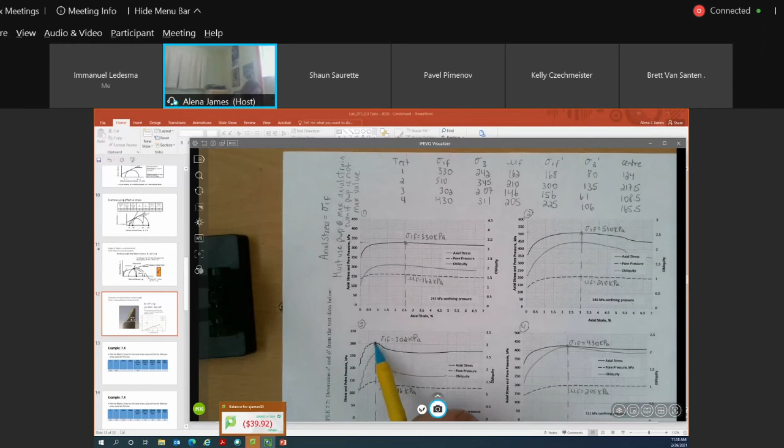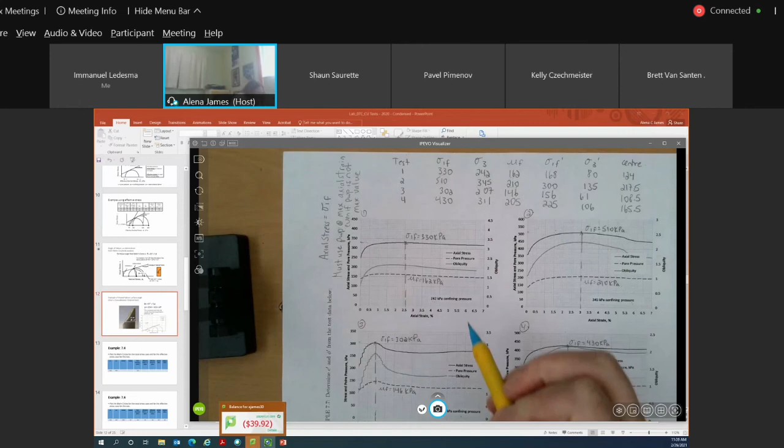My pore water pressure, again, I'm just going to draw a vertical line down to where it intercepts the pore water pressure curve. It's around, at this point, about 145-ish kPa, here I wrote 146. And I know my confining pressure is 207 kPa. So my axial stress, sigma 1, is 302, my confining pressure, sigma 3, is 207, and my pore water pressure is 146 kPa. So I just included that value there, 146 kPa.

And similarly, you would go through the same process with plot number 4, and you would determine what your sigma 1 value is, and what your pore water pressure is. The plots will always include your confining pressure, so you're never expected to calculate or determine that yourself, because it's always provided to you on your plots or graph.

So I'm going to pause here and see if anyone has any questions on how we determined our sigma 1 values, our sigma 3, or our pore water pressure values. No one has any questions? Does it make sense? Yes. Okay, good.

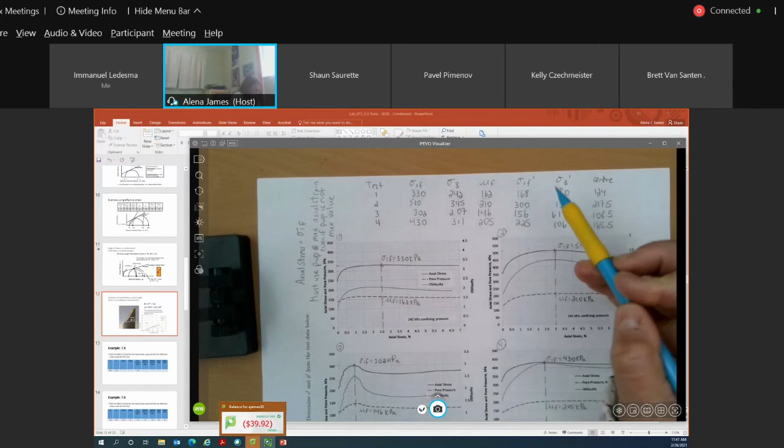Okay, so now we have our values of sigma 1, sigma 3, and our pore water pressure. These are our total stress values. Now we have to determine our effective stress values. We know we determine effective stress by using our total stress values and subtracting pore water pressure. So if we want our effective axial stress, we take our total axial stress, which is 330 kPa, and subtract 162 kPa. 330 minus 162 gives an effective axial stress of 168 kPa.

Similarly, for our effective confining stress or pressure, it's simply 242 kPa, our total confining pressure, minus our pore water pressure of 162. So 242 minus 162 equals 80 kPa. So our effective confining pressure is 80 kPa.

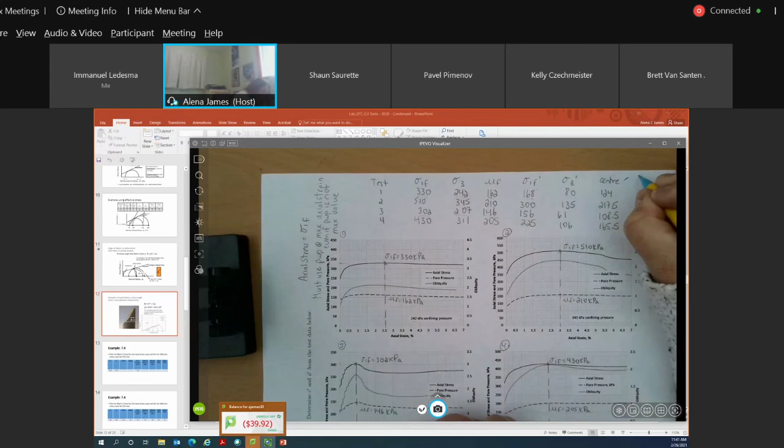And then I calculated what the center of our circle would be. The center of our circle represents the effective axial stress and effective confining pressure combined, so sigma 1 prime plus sigma 3 prime divided by 2. That's what's represented by the center of our Mohr circle.

So we have all of this data, we're armed with all of this data, and now our responsibility is to plot it up. I don't know how this is going to turn out, maybe it would work kind of to do this.

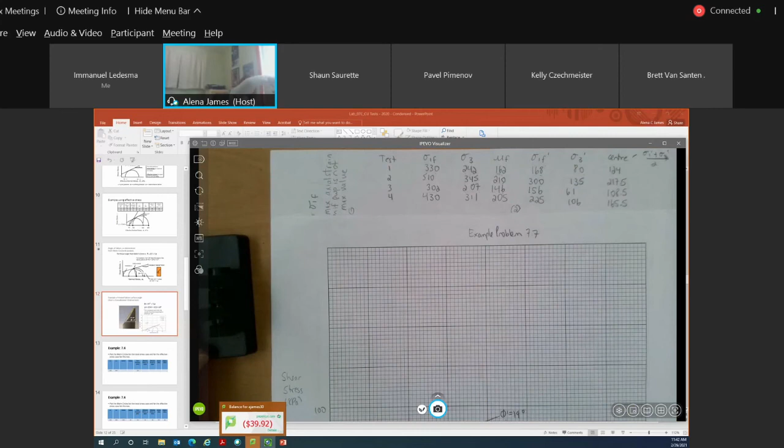Don't know if this is all going to show up. Kinda. Sorry, I'm trying to manipulate the IPEVO here a bit. It can only go so tall, and then... I don't know, about the best I can do.

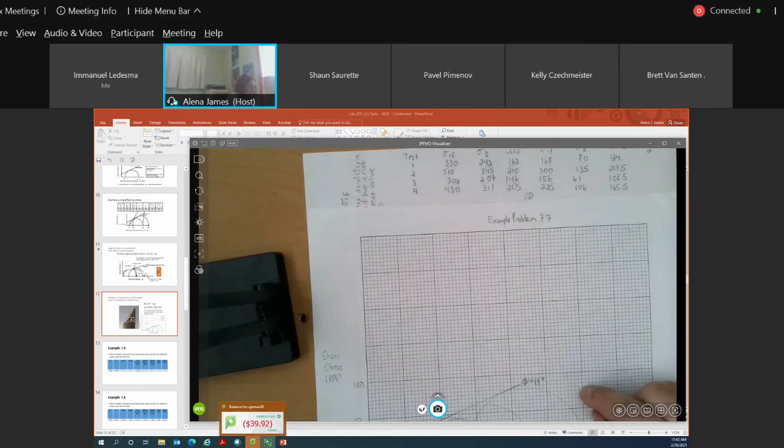Anyways, okay, we have our data, and now I have to plot the data. So here you'll see on my graph right here, the X and Y scales have to be the same. Each major grid line represents 50 kPa on both my X and Y axis. You'll see my axes are labeled shear stress in kPa, versus effective normal stress in kPa.

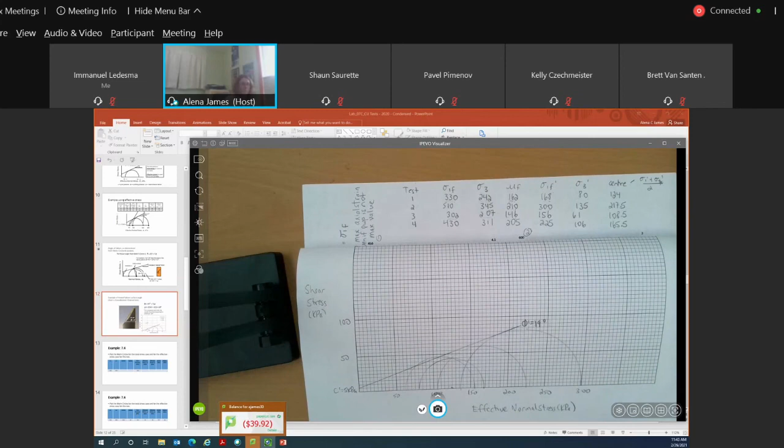So the effective, can I fold the paper? Yeah, I can try to fold the paper. That kind of works. Is that better for you guys? Move my hand out of the way. Okay, there we go. And I'll do this. Okay.

The IPEVO becomes finicky. Okay, so we'll look at our first Mohr circle here. Where did my compass go? Okay, so I know the center of my circle is 124 kPa, so that represents this data point right here. I know my sigma 3 value is 80, which represents this data point right here, so I can draw my first Mohr circle. This Mohr circle represents the data from test number 1.

Similarly, I could go to test number 2, and I know the center of my circle is 217 kPa.

And I know sigma 1 is 300. So sigma 1 prime is 300. I can move the pencil of my compass out, and I can draw my second Mohr circle.

And I go through the same process for test number 3 and 4, and I end up with these 4 Mohr circles.

These Mohr circles don't all have the same point of maximum curvature where you can just draw a really nice line of best fit. You kind of have to do some data interpretation and decide how you want to draw your line of best fit.

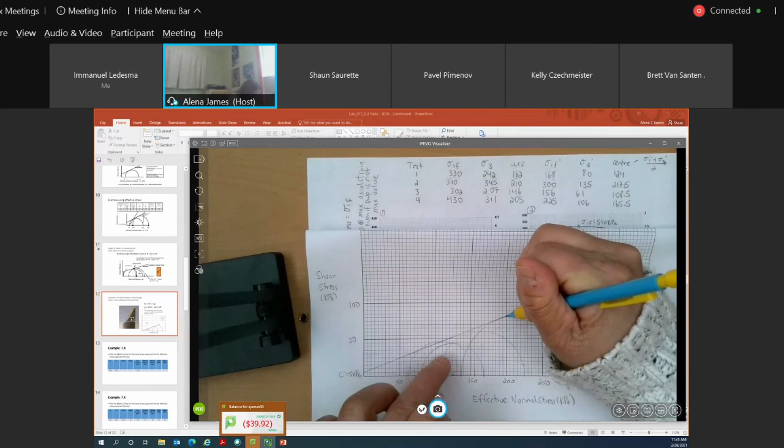So what I tried to do here was I tried to draw my line of best fit so it intercepted this Mohr circle at its point of maximum curvature, was a little bit lower for this Mohr circle here, but it was a little bit higher for this one and a little bit higher for this one.

So my line of best fit, I just kind of drew like this. My line of best fit intercepted the y-axis at about 5 kPa, and that would be my effective cohesion value. My effective friction angle was about 19 degrees when I calculated the slope of the line.

So with CU tests, sometimes the Mohr circles don't exactly line up, but just do a line of best fit. Again, I'm looking for process, and there's a range of values that I'll accept for your shear strength parameters.

So this is the most complicated question I would ever give you on a test. For CU data, I don't even think I would give you the data and ask you to interpret what your maximum axial stress would be on a test. I think for UU it would be fair game, but not for CU.

But this is the most complicated question that you would see, and you won't even have a question this complicated on your test. I just wanted you to be familiar with the process because you do have to know how to plot CU test data. So I'm going to pause and see if anyone has any questions.

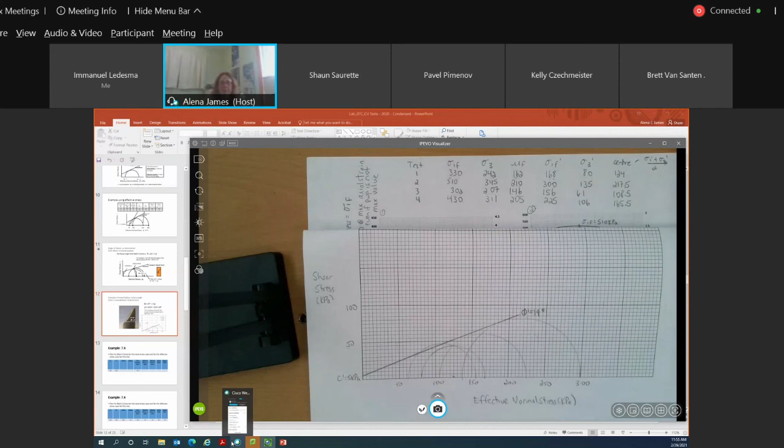Alena, yes, you said just open the quiz we just wrote for access to study, right? Not another quiz?

Yeah, so for the unconfined, Kelly—if you wanted to look at your unconfined because you didn't get 8 out of 8, that will be open for students to see where they made their mistakes. Oh, okay, and same with direct shear. I'll open the direct shear next week as well, so students can take a look at the questions they didn't get correct on the quiz. Okay, yeah, thank you. Yeah, no problem. Have a good day. Yeah, you too.